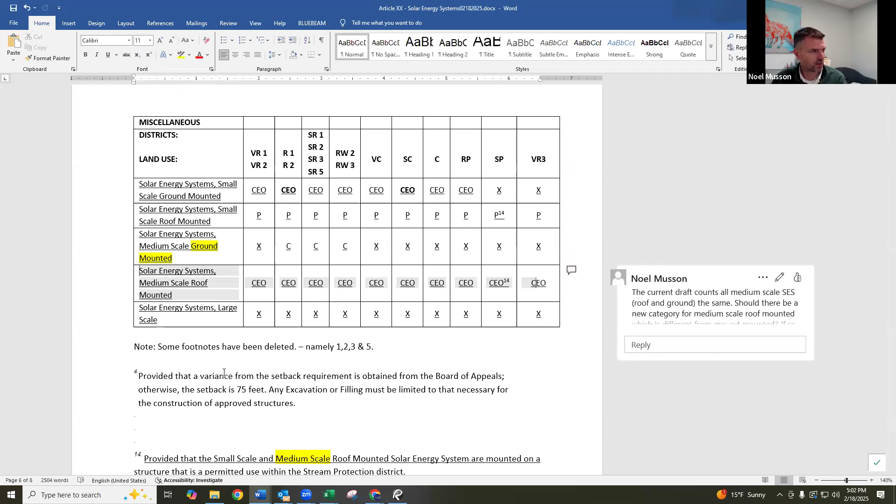All right, the first change you'll see, hopefully in yellow with a little note off to the side, is on page 2, which in the context of how you think about solar energy systems, there's ground-mounted solar energy systems and small scale roof-mounted solar energy systems, and each one is treated in the context of size. They're each kind of treated the same, and in our table of allowed uses we're making some distinctions between them.

So the way the committee had been talking about them was to treat all roof-mounted solar energy systems as if they didn't need a permit. But I think what we needed to actually do is add a column or row for medium scale roof mounted solar energy systems in the table of allowed uses.

I've added that, and also the term ground mounted solar energy systems, so that the medium scale ground mounted solar energy systems are the ones that require planning board approval through conditional use. Those are allowed in the residential 1 and 2 districts, all of the shoreland districts, and the rural woodland districts. For context, medium scale is basically 15,000 square feet to an acre or 2 acres. And those are the only places in town where those systems would be allowed.

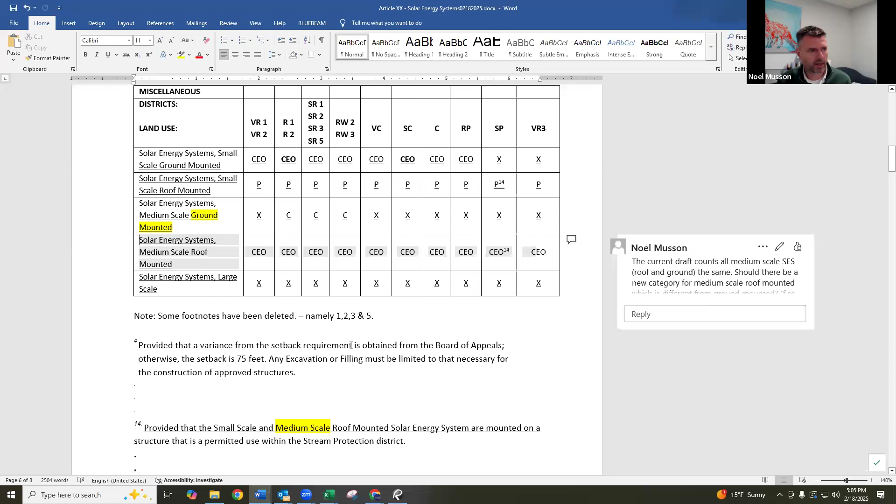So want me to keep going? Yep. All right, so in order to do that, under footnote 14 I added medium scale, because footnote 14 is basically the stream protection district. If you're not an approved structure in the stream protection district, you really shouldn't have any of those. So I just added the term medium scale to that footnote, which was already there before.

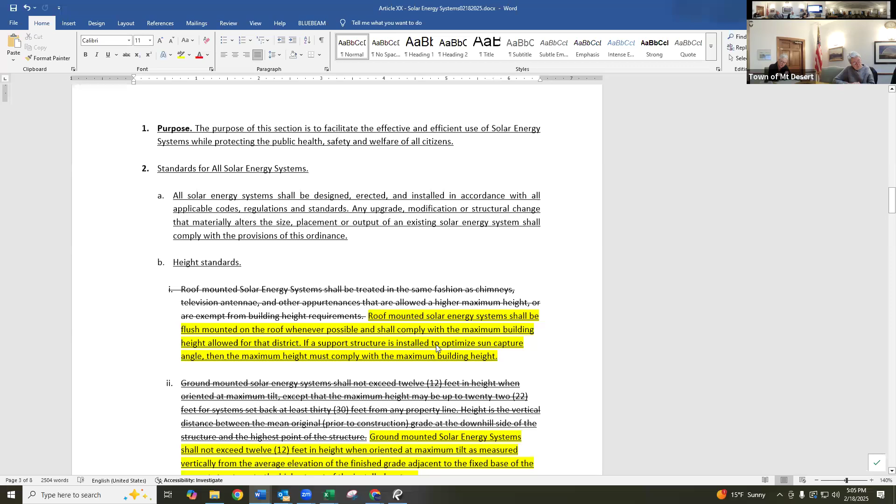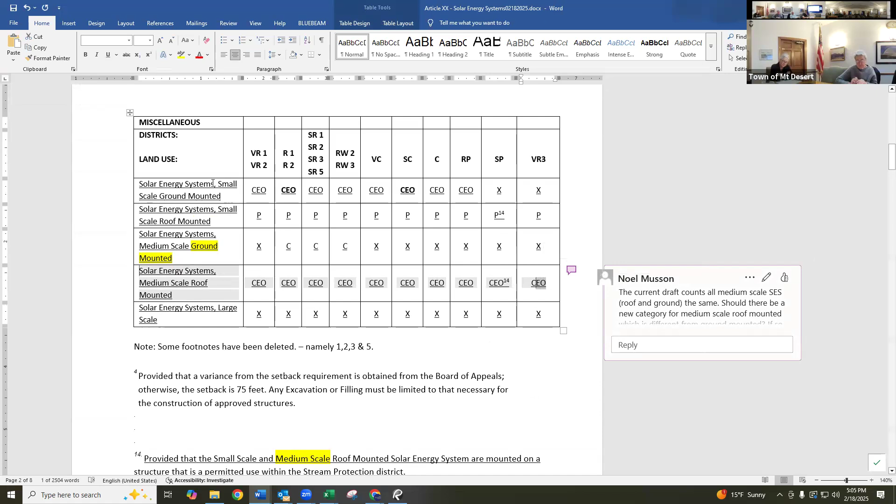And that's different from a ground mounted system, which we don't want to allow in a VR3, I would assume.

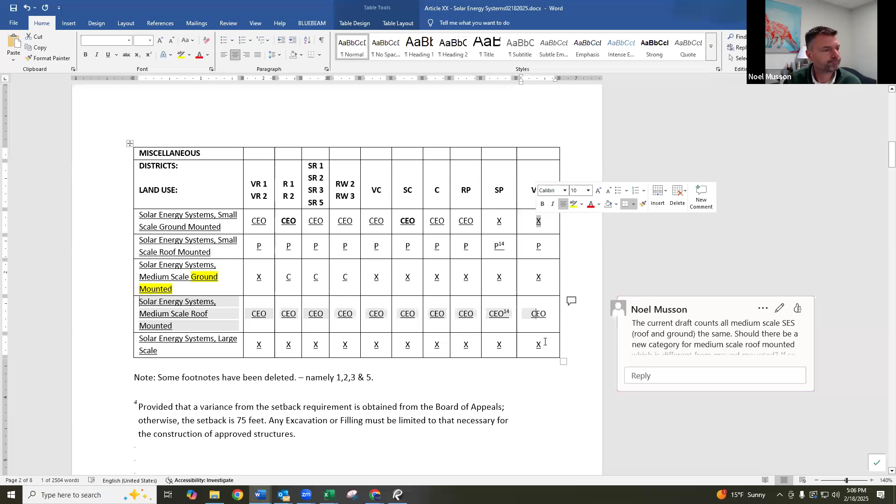The next change deals with height. This was discussed with the sustainability committee, as Gail mentioned, and a few people thought our blanket exemption of any roof mounted solar energy system as it relates to height probably wasn't the best idea, so we made this change under B1.

The change would be: a roof-mounted solar energy system shall be flush-mounted on the roof whenever possible and shall comply with the maximum building height allowed for that district. If a support structure is installed to optimize the sun capture angle, then the maximum height must comply with the maximum building height. This deals with the scale issue we discussed, like whether you can flip it up a little more when you're on a flat roof structure.

We couldn't quite figure out a way to make it work in the language I had in one draft, but I think this captures it.

Can I ask you a question? Yep, please.

You state that roof mounted solar energy system shall be flush mounted on the roof whenever possible and shall comply with the maximum building height allowed for that district.

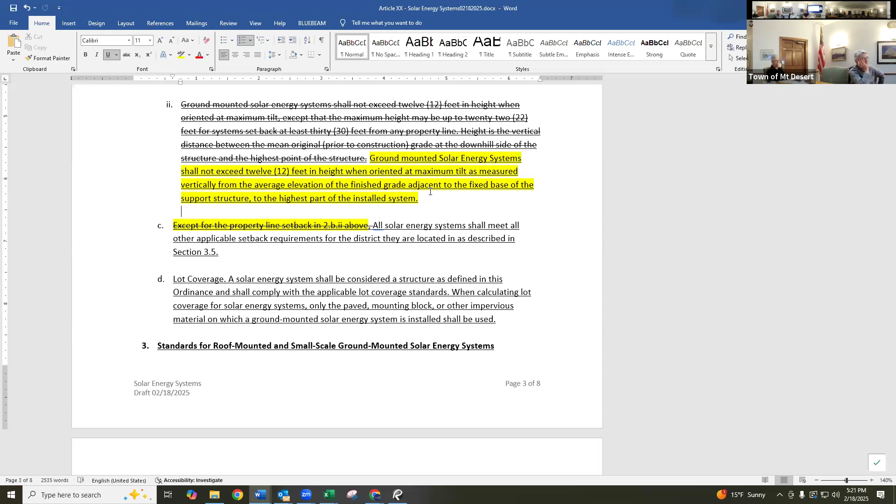Is that a typical height of a freestanding ground mounted panel? That's what every ordinance I have seen says—something about 12 feet, or sometimes it adds that 22 feet provision because some of them are on posts, and then they flatten and they're more square than rectangular. Well, we are shooting in the dark with that for sure. 22 feet is the size of a single story house and its roof—I mean, that just seems like so much.

Yeah, I agree. And I just can't even see it in my mind's eye as a next door neighbor. It's low—I think 12 feet is low.

So pick a number. I'd say probably 20. 20 is huge, though, but you might as well do 22 then. Well, you've got long, lean ones that stand out that I've seen. They're pretty tall, but you've got next door neighbors. It's one thing to be in an industrial area doing these things, but if you're talking about backyard solar systems, they also need to be screened.

Yeah, we are saying that too. As long as you're not gonna screen the south side - whatever side needs the sun, obviously you're not gonna screen, and people aren't gonna want to do that, because the whole purpose is to get the sun. So they're not gonna be screening on the south side, but the other sides, the back sides of those things, probably should be screened.

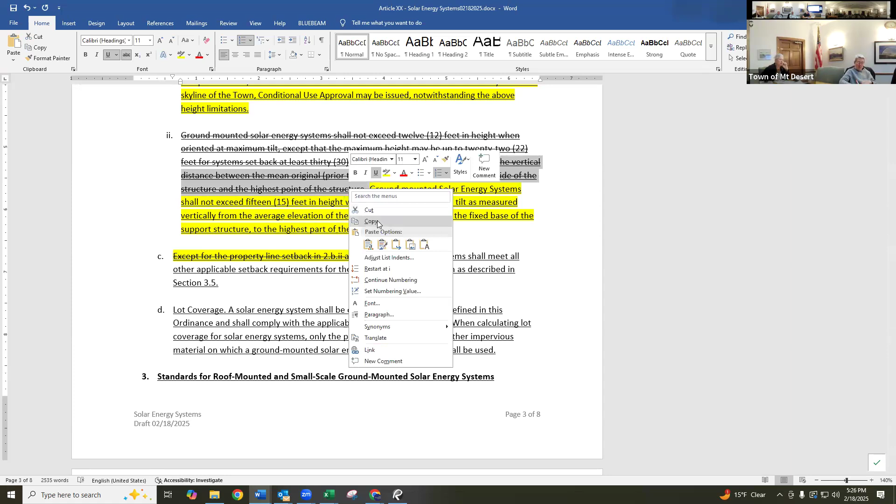Go from average elevation to mean original to finished grade - let's be consistent throughout. Yeah, just makes it easier.

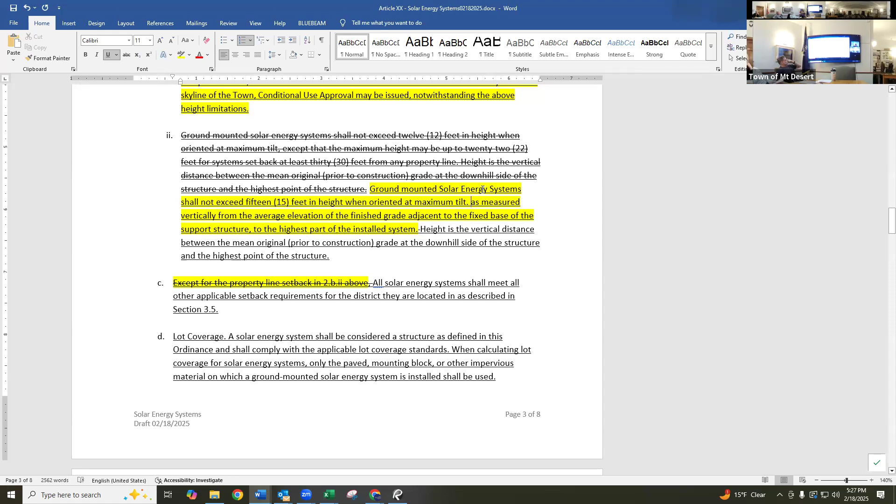Then they're gonna meet all the... Then it's gonna read: ground-mounted solar energy system shall not exceed 15 feet in height when oriented at maximum tilt, period. Height is the vertical distance between the mean original grade at the downhill side, prior to construction, and the highest point of the structure.

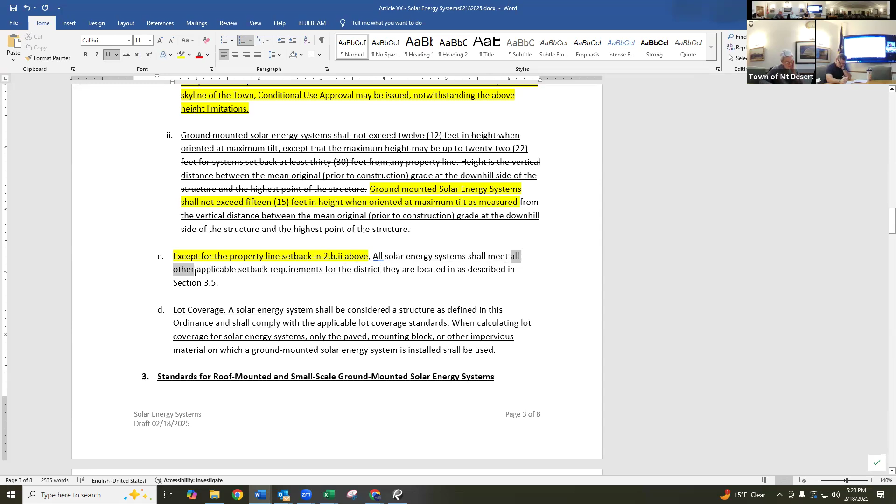Yep, yes, thank you. Okay, all right. And then in doing that, the other thing that I changed was this exemption up here, because we didn't give the 30-foot. It really should say all solar energy systems shall meet applicable setback requirements for the district they are located in. Yes, yes. Okay, yes. And so then I'm going to delete this. Whoops.

Great, all right, moving on. Under this one, these are standards for roof-mounted and small-scale ground-mounted solar energy systems. I think I might have added roof-mounted. Small-scale roof-mounted solar energy systems are permitted without permits in all districts, as we've talked about. And then small-scale ground-mounted solar energy systems and medium-scale roof-mounted solar energy systems require a building permit from the code enforcement officer. So I just added that.

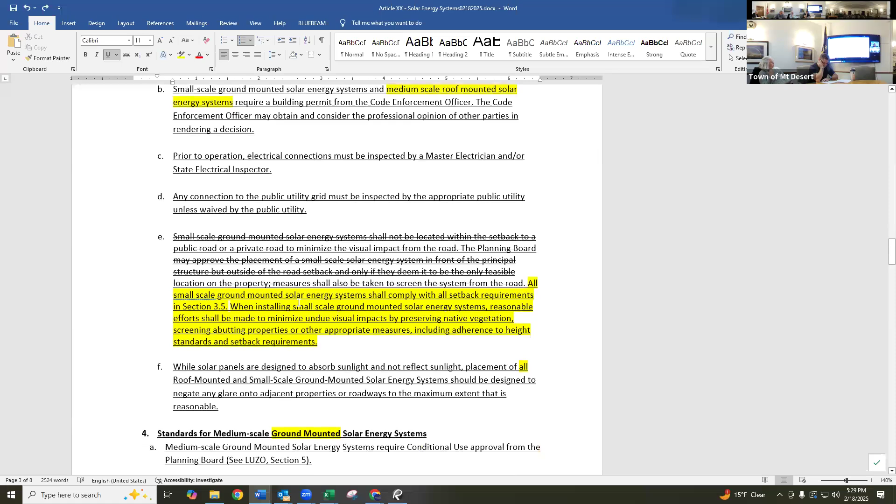Under this one, Kim, this was where Andy and you and I were having this conversation, and Andy wanted to add a sentence at the beginning. Originally the draft had something about only requiring ground-mounted solar energy systems to be located on the sides of structures and not in the front yard. Then we got into this discussion about how you don't have a definition of what a front yard is. Technically in the ordinance, your front yard is the way that you get into your property through a driveway, which kind of defeats the purpose if your driveway is like Gail's house, where her driveway's behind the main road.

So it kind of defeats the purpose. I didn't like the way that this was written, and I went back to the goal, which was to require reasonable ways to mitigate visual impacts. So this is what I came up with: all small-scale ground-mounted solar energy systems shall comply with all setback requirements. When installing small-scale ground-mounted solar energy systems, reasonable efforts shall be made to minimize undue visual impacts by preserving native vegetation, screening abutting properties, or other appropriate measures, including adherence to height standards and setback requirements.

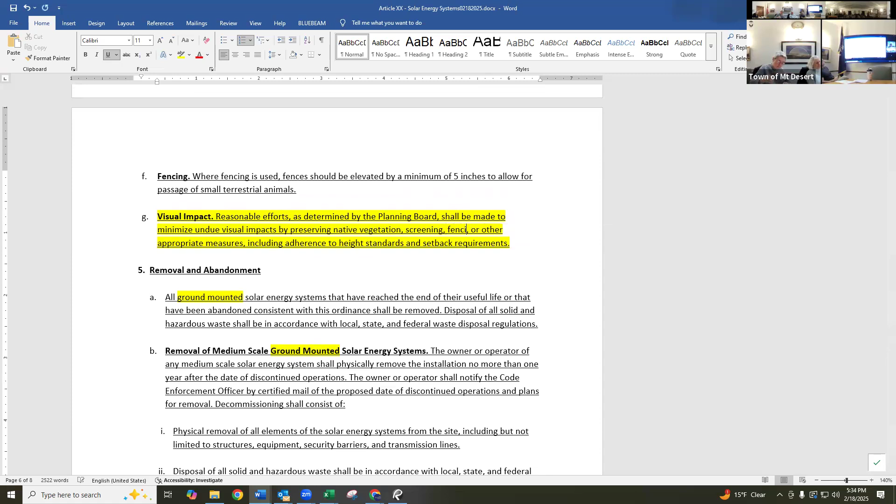I'll keep going unless you tell me to stop. Yeah, keep going. Visual impact — this is a standard: reasonable efforts, as determined by the planning board, shall be made to minimize undue visual impacts by preserving native vegetation, screening, fencing, or other appropriate measures, including adherence to height standards and setback requirements. So this would be, again, for medium scale systems.

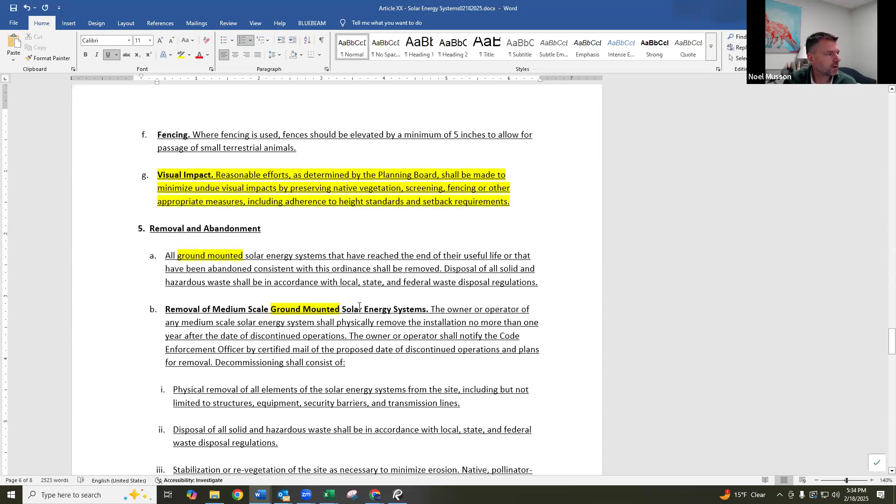So now we're getting into removal. In the original version, there was a removal section and an abandonment section, and to me they all kind of blended together, so I just created section 5 and combined the two.

And then the first one is thinking about specifying that when we're talking about removal, we're really talking about all ground-mounted solar energy systems, but not the roof-mounted ones. That's kind of a policy distinction, just to be clear. Make sure that's okay with everybody.

Why aren't we talking about the roof-mounted ones? The question is, what is our purpose? And the purpose is to avoid the landscape being littered with defunct structures, as opposed to something that's just on your roof. I can envision people saying, I'm going to probably have to redo that roof in 3 years anyway.

So we want to avoid making people do that without — I mean, if there's some environmental reason to do it, which I haven't heard, then we might want to have it removed too, but it's really the visual impact of those defunct, somewhat industrial-looking structures.

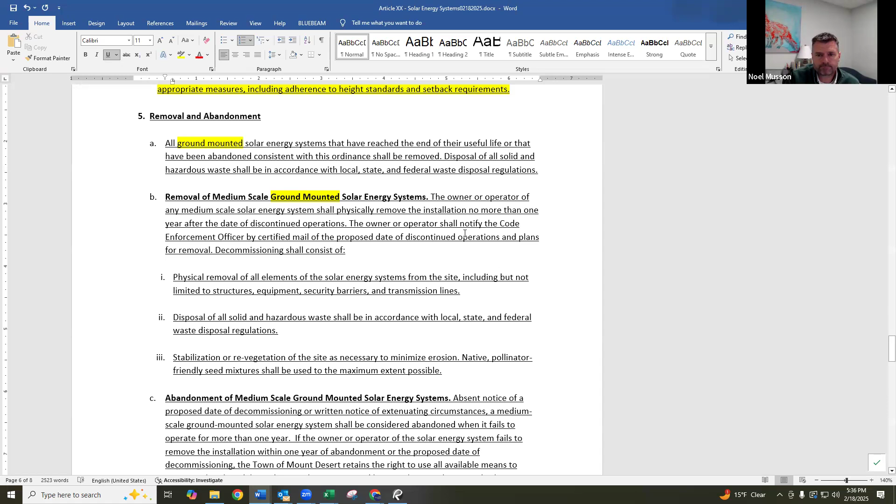And it might be — yes, I guess it should be — that's why the 'or' is in there. Does that make sense, or do you want to talk about it some more? You all set with that? I think we're all set.

And then the next one is removal of the medium scale ground-mounted solar energy systems — since they're bigger, they have a different set of removal criteria. And then essentially I just combined the abandonment section, because it really was always talking about medium scale — that might not be right, so...

It always said: absent notice of a proposed date of decommissioning or written notice of extenuating circumstances, a medium scale ground-mounted solar energy system shall be considered abandoned when it fails to operate for more than 1 year. I didn't change that, I just took two paragraphs and made them into one.

You're saying we want to leave that for just the medium? It's really a question — do we just want to leave that only for medium? Well, how do we enforce the removal of the small scale systems if we say you've got to remove it, but I don't think you can.

How do you know there's no proposed decommissioning or written notice of extenuating circumstances for a small scale ground-mounted system, because it doesn't go to the planning board? So what's the leverage to get the small ones removed? I don't know. We're not asking for a decommissioning plan for small scale systems — they just get a permit from the code office.

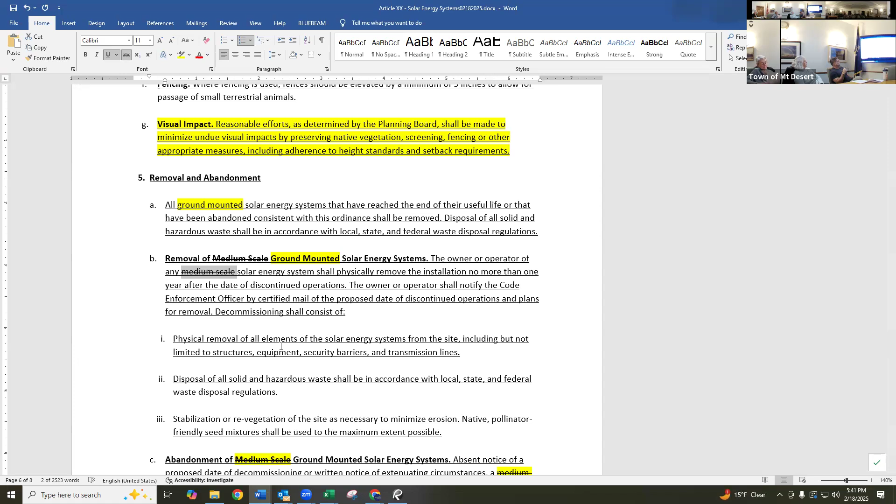Okay, yes, thank you. We're not over-governing on that, are we? I don't think so. We'll get told if we are, but the model ordinances we've looked at, the intent is to make the small scale stuff easy for people, and the medium and larger ones that are more commercialized have to go through a harder review process.

Well, they're still doing that, there's no question. Our policy is that when you're done with the ground mounted system, you should make plans to remove it within the year and get it done within a year, once it's not functioning anymore. And they don't score a lot of style points.

I can make those changes, no problem. Thank you.

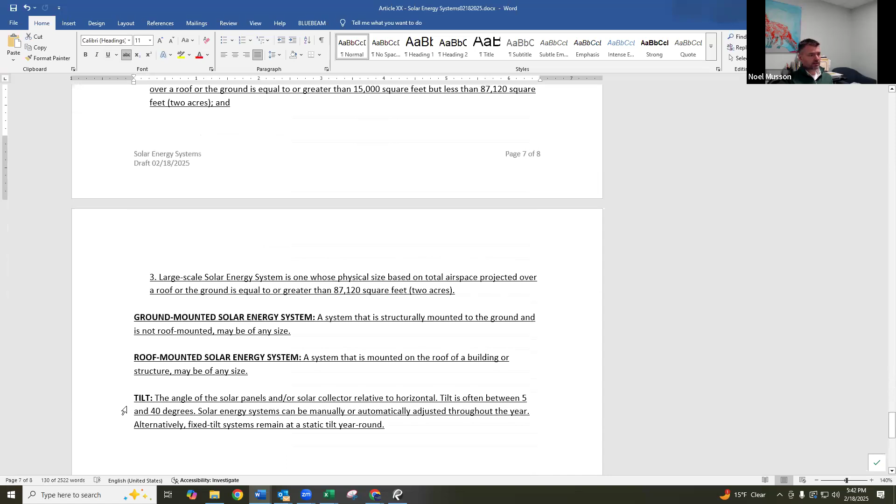So basically, we're not making any changes to the definition of height, so I'm just taking that out of our warrant article, and everything else is the same. We changed it to 15 feet, is that something different? No, we haven't made any changes, so that's coming out. That's not a proposed change, there's no change there.